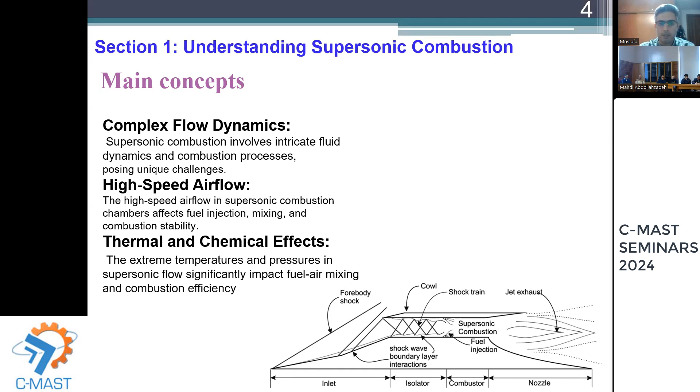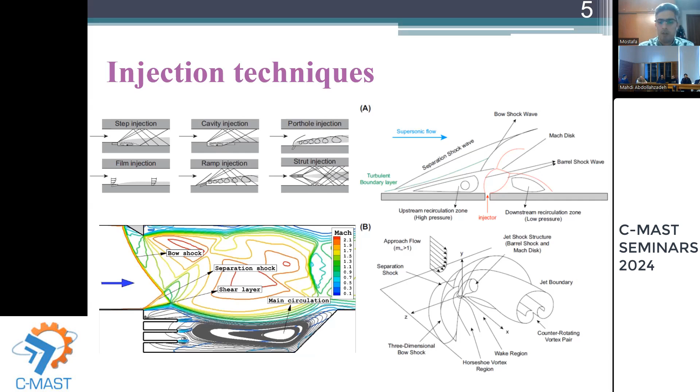The left side schematically demonstrates the complexity of the flow when using a shock generator along with a cavity flame holder. The usage of any shock generator inside the combustion chamber results in bow shock, separation shock wave, shear layers, and main circulation, which is very crucial in the combustion chamber. First of all, I want to introduce our methodology for the simulation of these innovations.

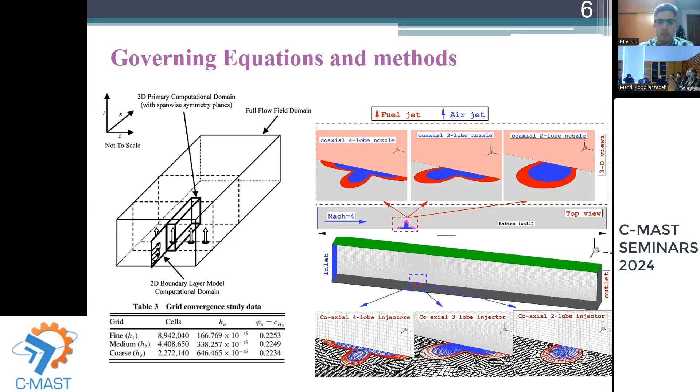As you can see, we have developed a new injector type, which is lobe injector nozzles for fuel mixing inside the combustion chamber. We have examined three types: 2-lobe nozzle, 3-lobe nozzle, and 4-lobe nozzles with inner air jet for the combustion chamber. As you can see, although the selected domain is not very large, the grid generation for our model is really high because there are lots of critical regions near the jet injection region where the jet encounters a free stream and results in different regions and problems.

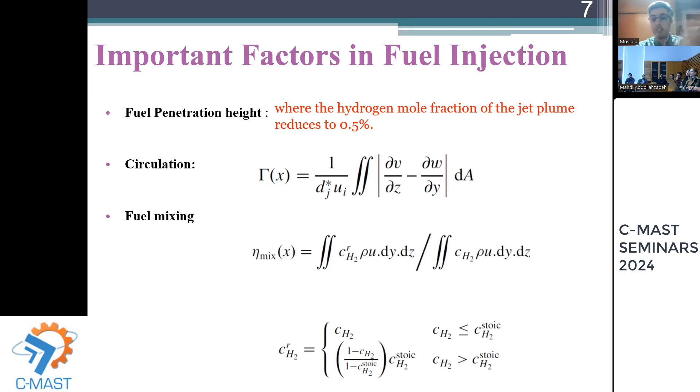The third one, which is very important, and all the evaluation of any injection system is based on this factor, is known as the fuel mixing efficiency. The formulas for the calculation of these three parameters are presented in my slides, and we'll discuss in the next chapter how these factors change along our study.

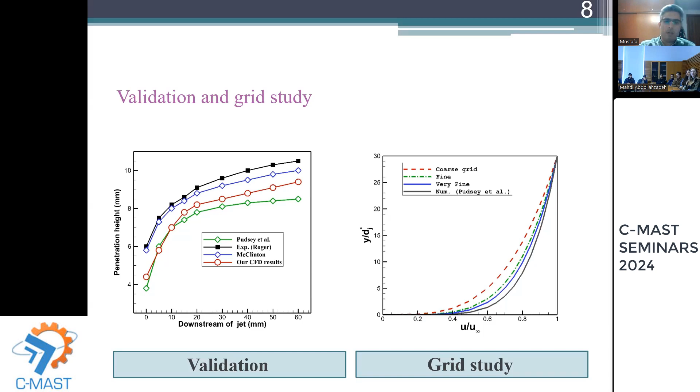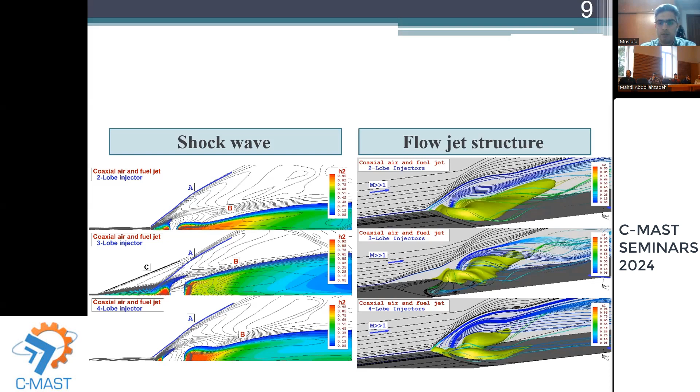In this slide, I'll demonstrate the mixing zone, and especially, as you can see here, the produced upstream vortex, which is the region where our horseshoe vortex is initiated. On the left side, I demonstrate how these vortices trail downstream. The main vortex, as you can see here, is known as the vortex pair, as I show in the schematic flow field. And the second one is the horseshoe vortex, which is different for these different geometries. When it moves downstream, the strength of the horseshoe vortex is weakened, and the main flow is related to the vortex pair.

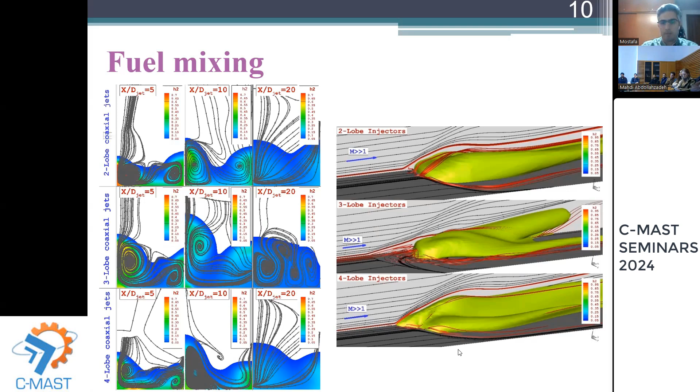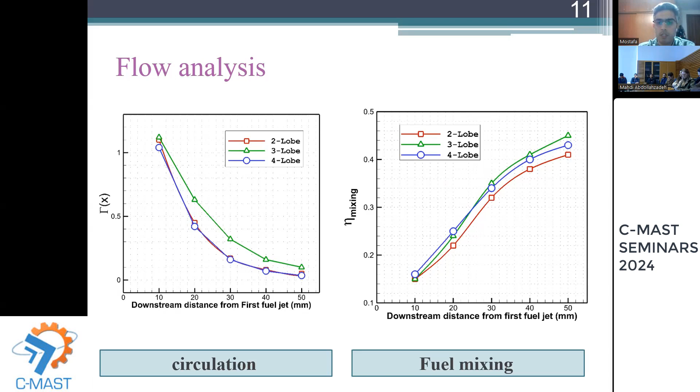In order to improve the performance of the fuel mixing inside the combustion chamber, we have used a shock generator, which is demonstrated here as a wedge upstream of the flow on the top side, which results in the creation of the bow shock, which results in efficient fuel mixing downstream.

On the right side, you can see how the flow changed, especially when the shockwave generator is used. The clear distinct difference with the usage of the shock generator is the strength of the upstream circulation, which intensifies and improves the fuel mixing near the jet.

Comparison of the fuel mixing of these 3 injectors also confirmed that fuel mixing is improved by using 3 lobe nozzles; 3 lobe nozzles with a shock generator have a higher fuel mixing inside the combustion chamber.

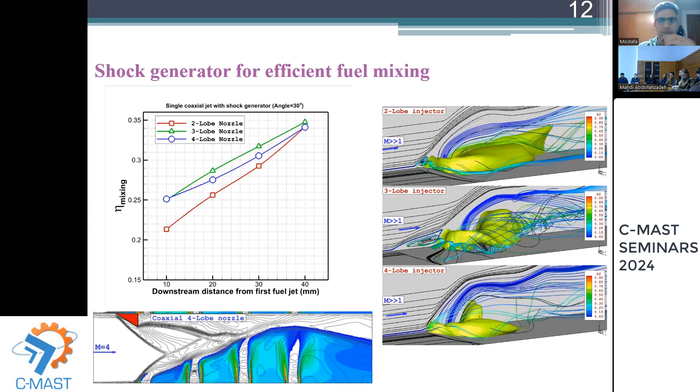The main change we have done here is to replace a single 3 lobe, 2 lobe, 3 lobe, and 4 lobe nozzle with multi equivalent nozzles of the same type. Changing a single circular jet with a multi-jet significantly improves our fuel mixing in the combustion chamber.

As you can see, the flow field and the growth of the penetration height is the main change associated with the replacement of the single jet with a multi-jet.

Here we changed a single jet with 4 multi-jets, and you can see here the flow completely changes due to interaction of these jets with each other and creation of extra circulation and vortex in our model.

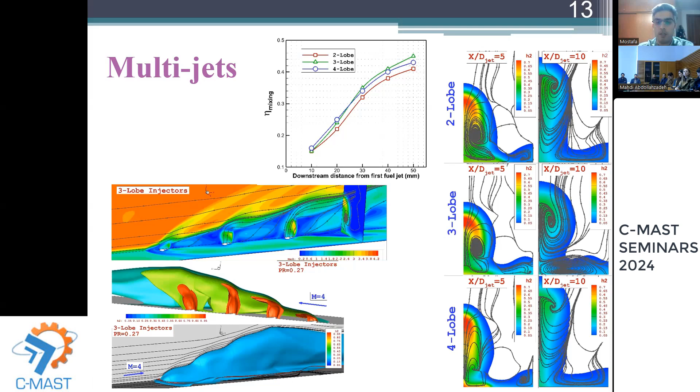On the right side, the evaluation of the flow on 2 planes downstream of the injector clearly shows that the usage of a multi-jet significantly improves the fuel mixing, especially the vortex pair and circulation downstream of the injectors.

In the next step, we have developed our multi-jet with a 2 lobe, 3 lobe, and 4 lobe injector with a new idea: increasing the height of the nozzles relative to each other. As you can see here, the second, third, and fourth injectors are extruded from the bottom, and this technique clearly increases the interaction of the free stream with the injectors.

As displayed in the previous slide, you can see that the interaction of the last injectors with the free stream is under the shield of the upstream injector. But when we used an extruded configuration or arrangement of the injector, the interaction of the fuel jet with the free stream is preserved and maintained downstream in the proposed models.

You can see how the horseshoe vortex trails downstream in the upper figure. In the lower figure, you can see the oblique shock. Here, we used the shock generator for the development of the single extruded injector and demonstrate how use of the shock generator results in oblique shock and separation shock in our model.

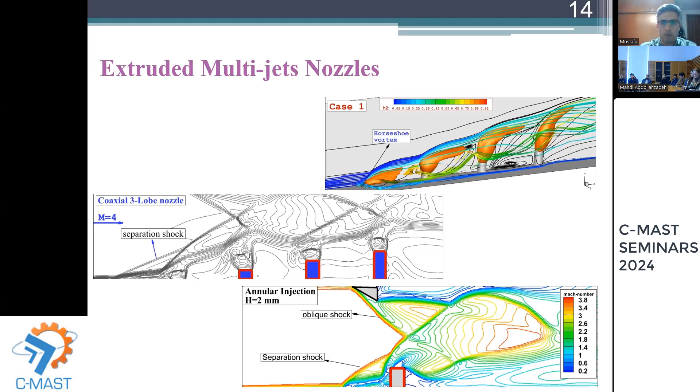Today, we have heard much about machine learning. Recently, the application of machine learning has significantly developed for computational studies. The main outline of this technique for fuel mixing is to optimize the fuel efficiency. Then we want to predict the fuel jets and reduce the computational time cost.

As you know, the main challenge of the real modeling of fuel injection is related to the analysis of real features of the flow in a transient injection. The injection process happens in a very short time inside the combustion chamber, and this intensifies the importance of real data, the prediction of the flow for the whole injection time.

So machine learning helps us to improve our data for the prediction of the fuel mixing. Just for example, if the injection in the transient phase happens in 1 minute, you can use just half of the time steps and then use machine learning for the prediction.

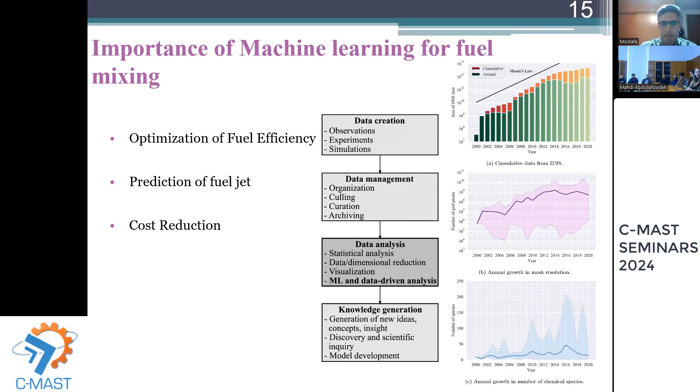The most conventional type of machine learning technique for the prediction of the flow is known as convolutional neural network, or CNN. In these techniques, they analyze achieved data, for example, a snapshot of the flow, which contains velocity or mass or temperature of the domain, and use this approach for extraction of the main data associated with the flow, and use these techniques for the prediction of the

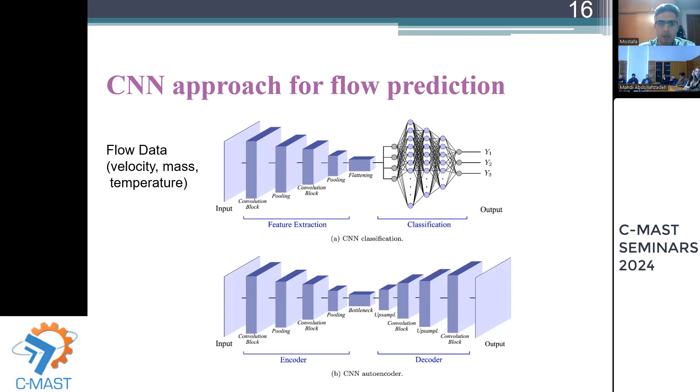other time steps. As you can see, the first step in the CNN is classification and feature extraction, using, for example, achieved data, and then several convolutional techniques are used for achieving a row of data. The achieved data is then classified by MLP techniques to achieve 2 or 3 significant data associated with these data. This technique is also validated with a decoder. Use the encoder for compressing the data and the decoder for expanding the data and evaluate. And these techniques completely preserve our data in encoder and decoder.

The second popular technique for our models, which is used in our investigation, is the proper orthogonal decomposition, combined with LSTM. In these techniques, we have used a few initial time steps for prediction of the flow. This schematic figure demonstrates how these techniques operate in our models. You extract initial data, important data, for example, main flow parameters, and then split our data to train and test and evaluate our precision by these techniques.

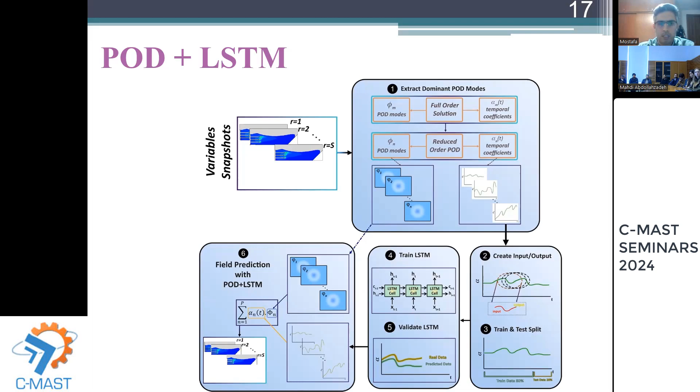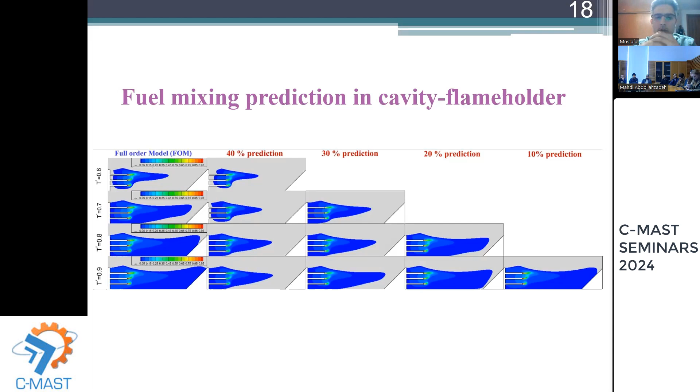Here is the result of our first simulation with a POD LSTM technique for the prediction of the fuel inside the combustion chamber. As you can see, if our time steps are trained for about 60% in the upper side, the prediction for just one stage is good. But if we want to predict with higher precision, we should have more available data, which demonstrates a higher accuracy for our results. When we have trained our data for 0.9, we can see that the predictions are more accurate for our models.

The future outline of fuel injection systems. Today several researchers have tried to enhance computational fluid dynamic modeling. One technique which is very used here is to use different techniques and combine them with machine learning to achieve reliable results and develop new ideas for efficient fuel mixing.

The second important concept for future injection systems is using nanoscale fuel injection, which has a lot of applications in recent devices. The third important outline for fuel injection is using an active control system. Active control systems dynamically adjust the fuel injection parameters based on real-time performance data, optimizing mixing and combustion.

And the fourth, but not the last, concept for the future injection system is multi-mode combustion systems. Most present injection systems are specified for a limited range, but in the future, adjusting the combustor based on the flight speed is the main focus of researchers in this topic.

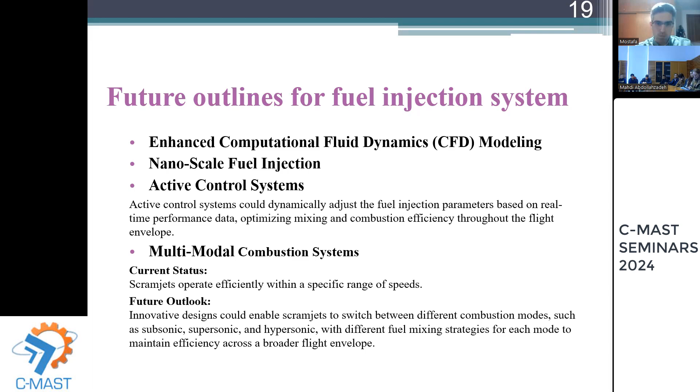I have also used CFD for other applications and other problems. Besides fuel mixing, I was motivated to use the CFD method for biomechanics, which is my favorite topic, which I followed after my graduation: analysis of the blood flow inside cerebral aneurysms. I used these techniques for the evaluation of blood hemodynamics inside cerebral aneurysms, and estimation of the hemodynamics and risk of aneurysm rupture via CFD is very important because it's really related to human life.

The importance of human life and health is clear for everybody, especially after COVID-19. As you know, the formation of aneurysms, especially saccular aneurysms, is an important challenge, and their rupture results in bleeding. We have used non-Newtonian models for simulation of the blood inside different cerebral aneurysms and evaluated how the usage of stents and the deformation of the aneurysm could reduce the risk of aneurysm rupture.